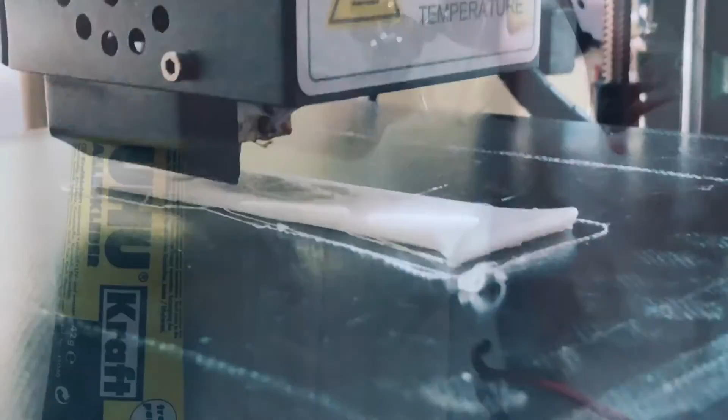Fashion is all about staying unique, isn't it? People create custom-tailored clothing and many other everyday items. But some items like a watch band is, or should I say was, more difficult to create.

At SelfCAD, we would like to show you how you can 3D model your unique watch band and 3D print it with flexible filaments that will feel and look really nice. Want to try? Then let's begin.

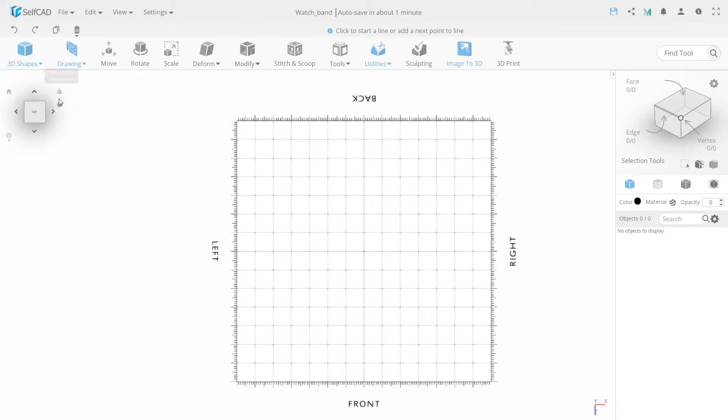We start by modeling the base. Select top view and orthographic projection to turn the workspace into a 2D canvas. Go to drawing section and select 3D sketch.

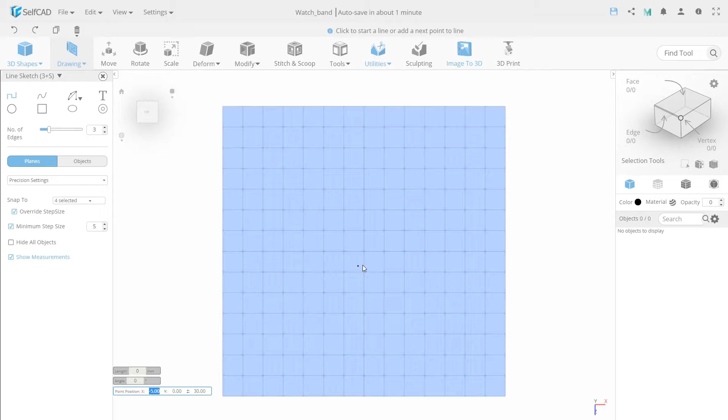In the drop-down, find precision settings and switch on minimum step size and set the size to 5 and check the override option. Choose rectangular sketch and set number of edges to 7.

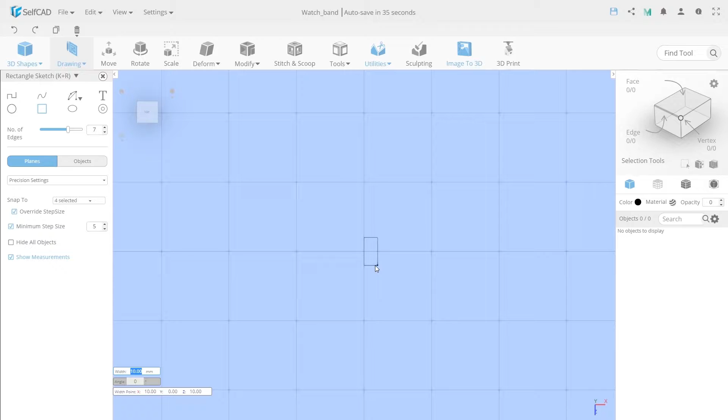To draw the base, we will start the first point from the center of the grid and move on the second point 2 steps, each step of 5, and then move down by the same amount, so the total edge length is 20. Then set the width to 72, and so we have a 20 by 72 rectangle.

Now let's make a divider to separate the band from the part with the magnets. Choose line sketch for this, find the top and bottom second points and draw a line between them.

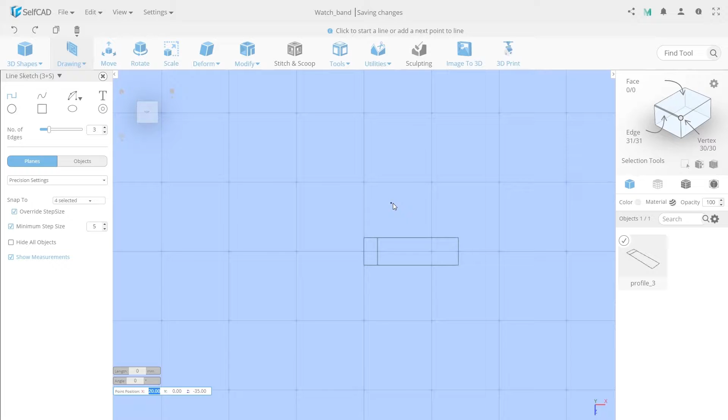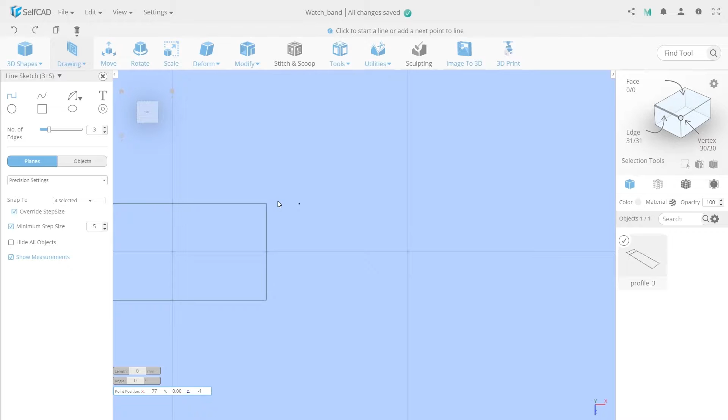For the next step, move the camera more to the right, and now let's create the part that will attach the band to the watch. It should have a width of 5, and since our rectangle ends at 72 from the center, draw a line at position 77 on the x-axis and set -17 as the first point on the z-axis and 17 on the second point to get an edge length of 34. Then click escape not to make unneeded dots.

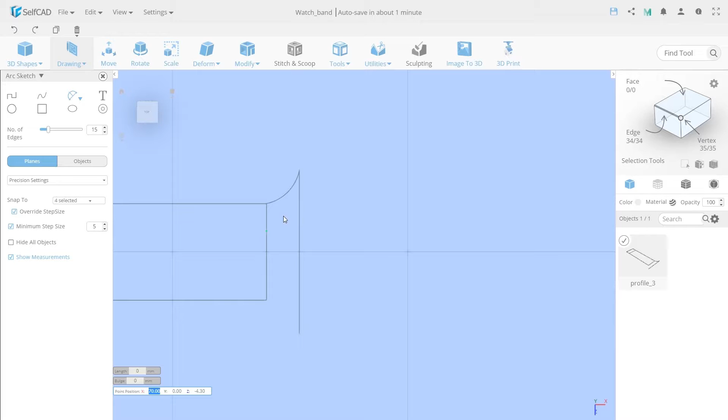Now let's combine them all with an arc sketch. Select a 2-point arc. Make sure you have the override step size on so it ignores the minimum step size when snapping to other points. Then draw the arc between the rectangle and the line and set the bulge to 1.5 and repeat the same on the other side and close.

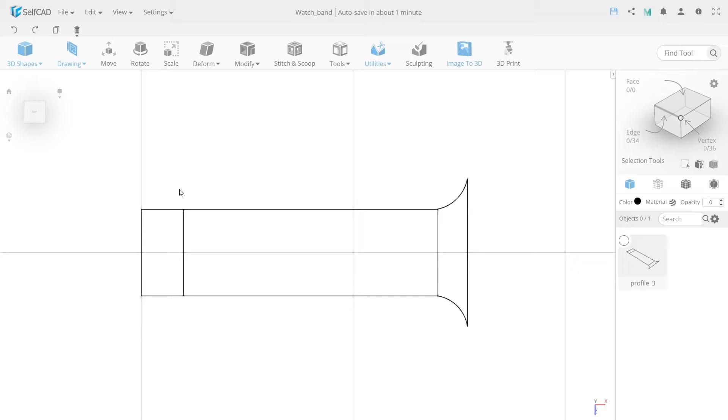Before we switch back to the perspective projection, we need to make a pattern. I'm doing it right now because it's easier to draw an appropriate pattern before I convert this profile into a mesh and lose the clear borders. So select the drawing tool and unhide all objects.

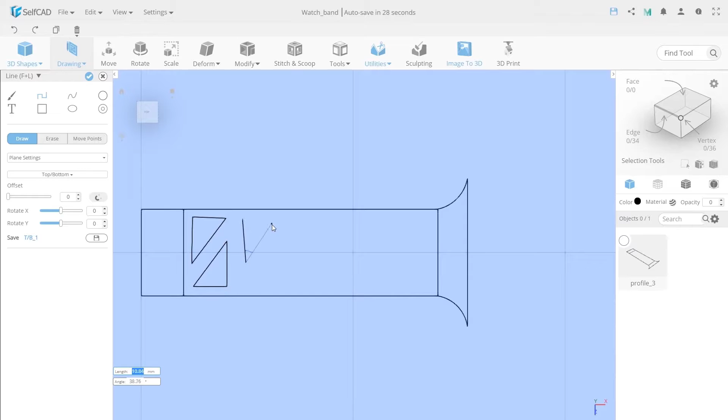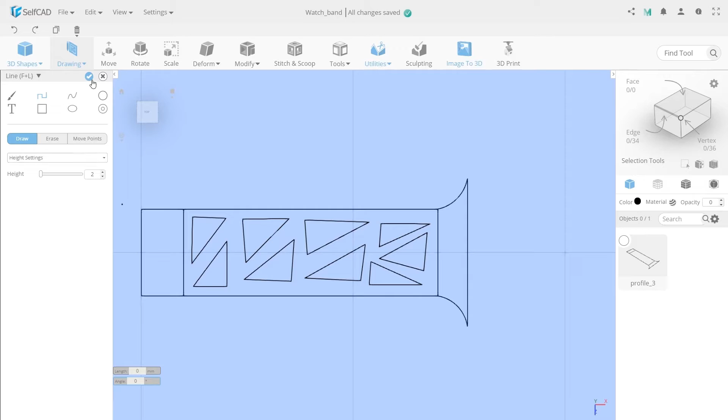Choose the line sketch and draw a pattern you want. I will make it from triangles. Now set the height to 2 and apply. Then turn the perspective projection back on to see our results.

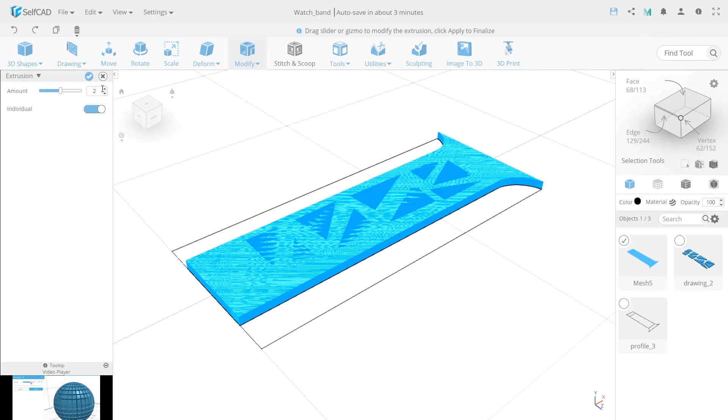To turn this profile into a 3D object, use fill polygons in the tool section. Then to add height, use extrusion with a value of 2. I will rename all objects now and hide the band pattern as we won't work with it now.

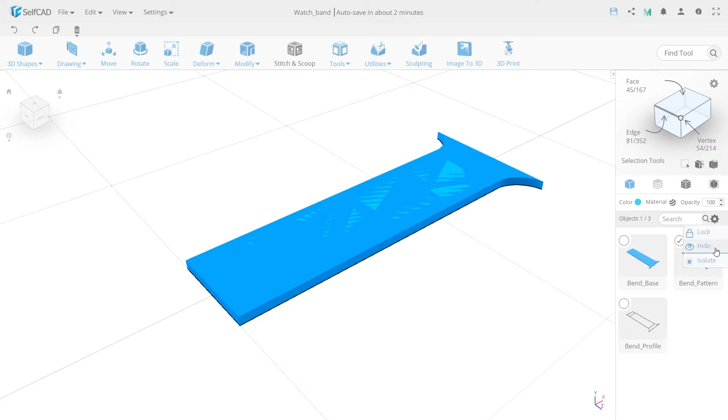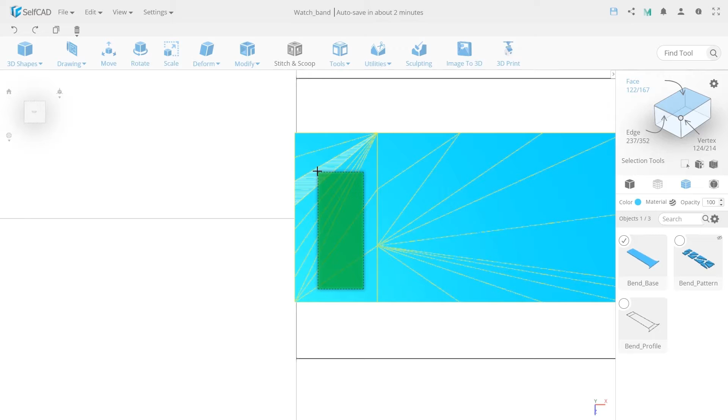We need to extrude the part where the magnet is supposed to be a bit higher. For this, switch to top view, turn on face selection, and switch to Mesh plus wireframe mode to see the lines we drew to divide the objects into 2 parts. Then select the smaller part and extrude it by 1.

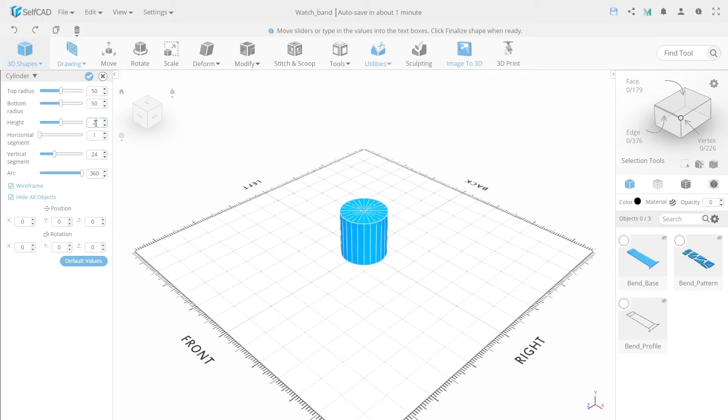Next we will create the cylinder that we will use to make a hole to position the magnets. Choose cylinder and set height to 2.3, both radiuses to 1.5 and vertical segments to 64 and finalize. Now we need to move it to the center of this part.

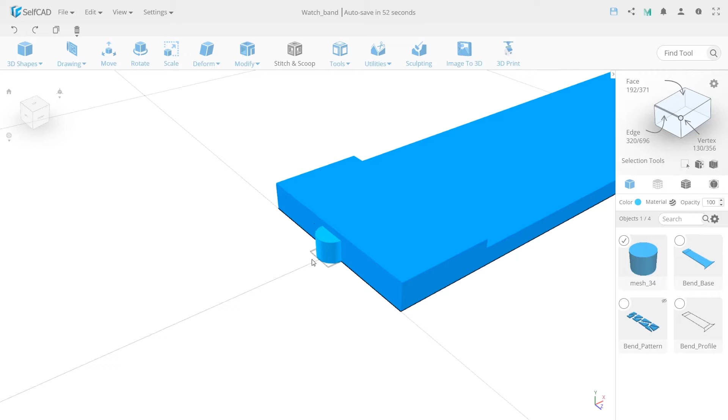However, to position it correctly, we need to do the math, and that can take some time. So I will show you an interesting tip how you can make such moves much faster. Every object has a pivot point that is used for the object's coordinates. By default it is in the center, but you can position it on some fixed positions of the object, or as in our case, we will position it manually.

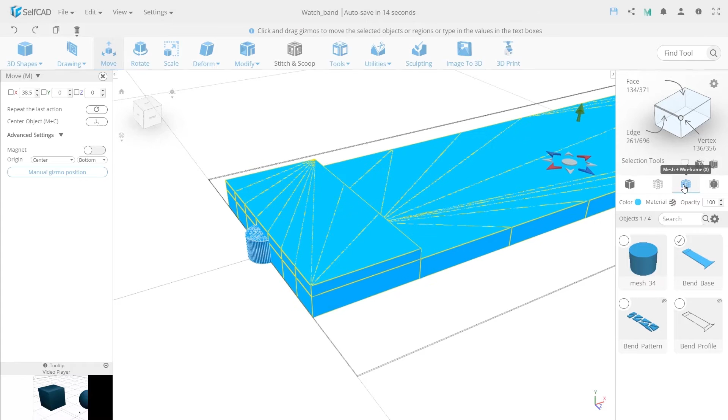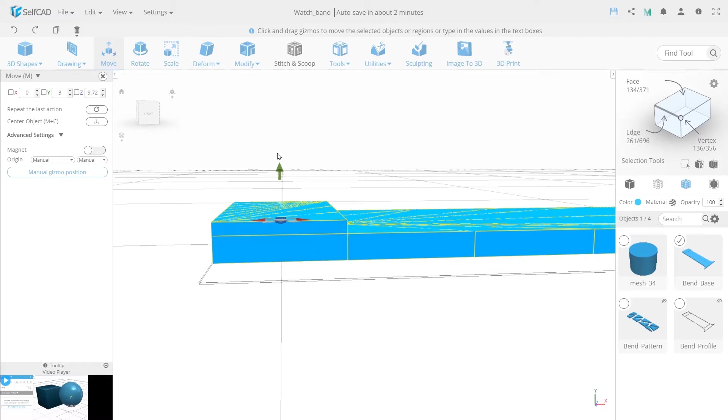Open Advanced Settings and use Manual Gizmo Position and place it in the center of this section. You can see that we have 5.03 on x-axis, and that's the distance between this part and the center of the grid. So we simply need to set the x-axis to 0, and this will place it in the center of the grid and align it with the cylinder. You can see the results by switching to wireframe mode.

If we deselect the object, the pivot point will reset back to the center of the object, and so we now have 33.47 instead of 0 on the x-axis.

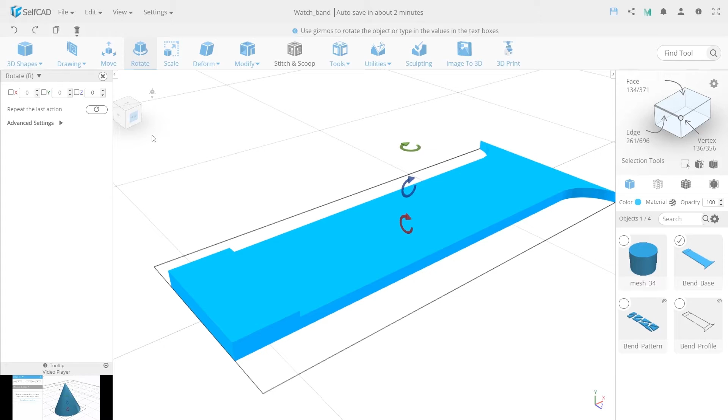Now if you rotate the object by 180 degrees on the x-axis, you will see that we are still missing the back faces. We can fill it with the Fill Polygon tool as we did before, but I want to show you that we can also fill it with Magic Fix tool. Select the base, turn on Magic Fix and set it to 148 and apply.

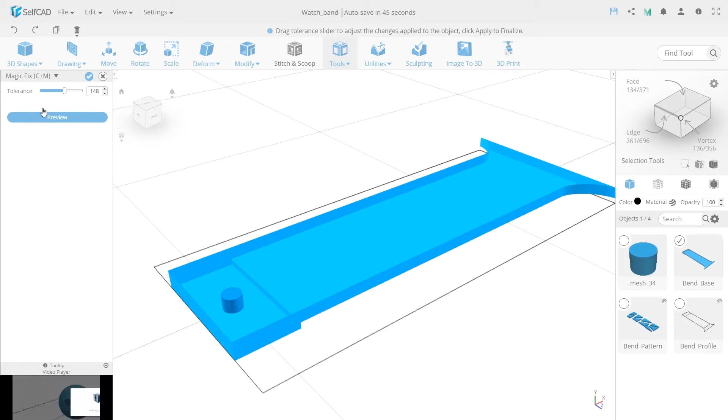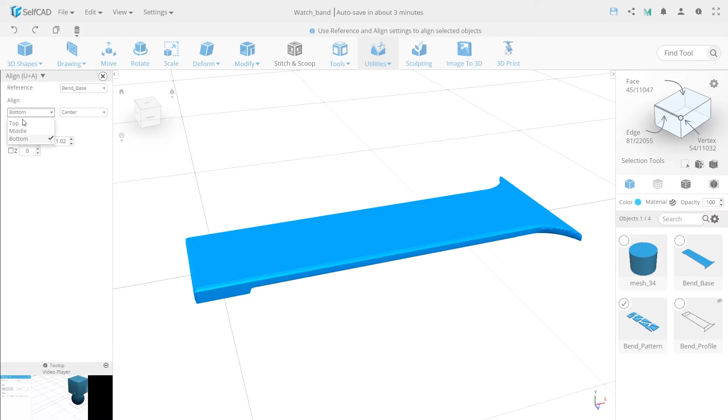Before we create the final part and make the assembly, I will unhide our pattern and align it using the Align utility. Set the base as a reference and align it to the top. I will also set a minus 0.1 offset on the y-axis to make it bulge in so that it will solidify correctly on the final step.

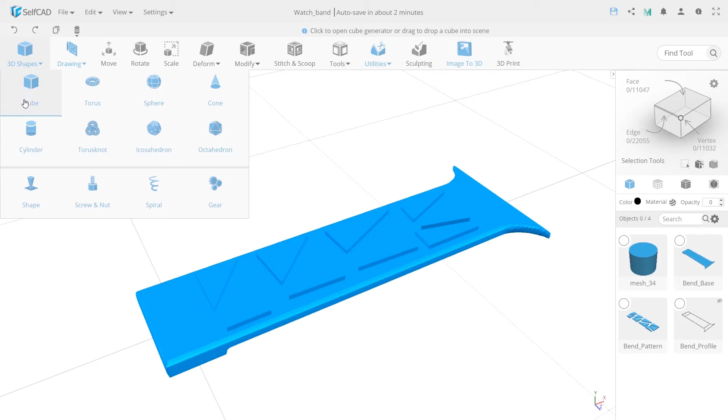The last part we need to create is a connector between the band and the watch. Select the cylinder shape and set the height to 34, top and bottom radiuses to 1.5, and rotate it by 90 degrees on the x-axis.

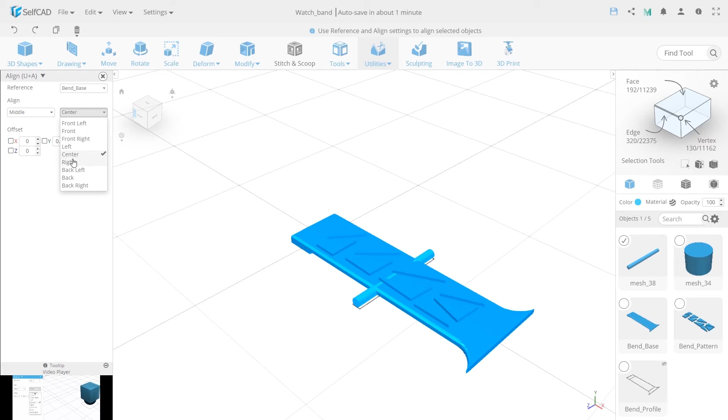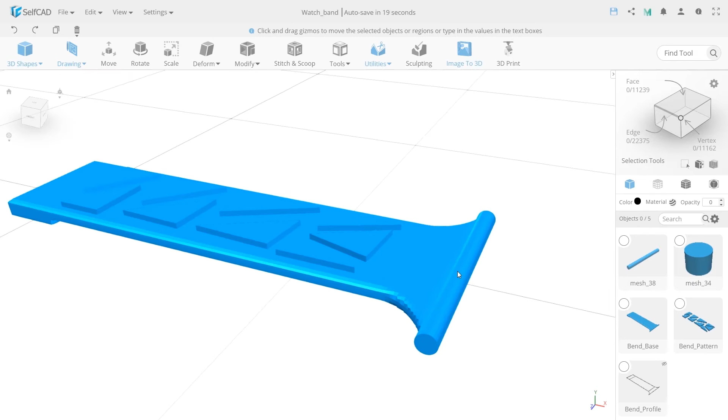Then, to place it correctly on the base, use the Align tool, select the right and middle option, but we need to place it on the right edge horizontally, so set minus 0.6 on the x-axis and move it to 0.5 on the y-axis. Now select all objects except the part that will be used to cut and merge them.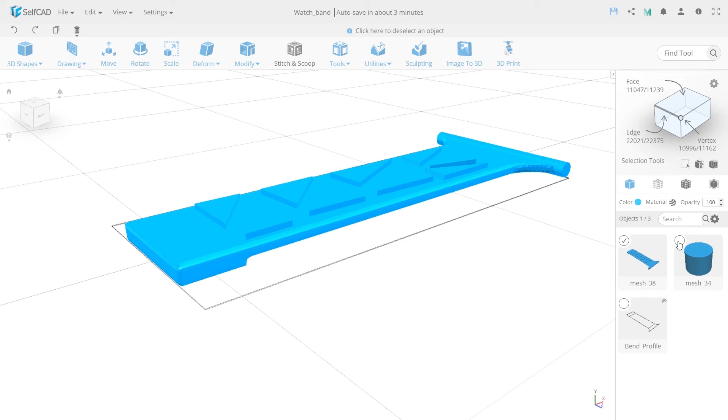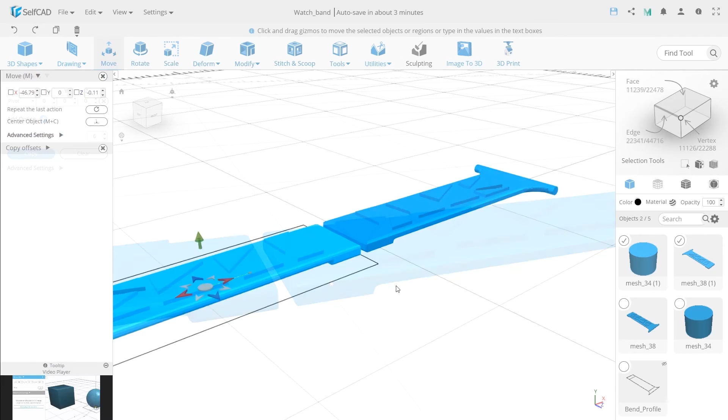We are almost done, but we first need to create the second band. We can simply make a copy of all the objects and rotate them or use the mirror tool, but I would like to show you how you can do it using the pivot tool in a copy offset. This tool will do it all in one step, and it's also a very powerful tool for creating many copies in a circular pattern. Now let's rename the objects.

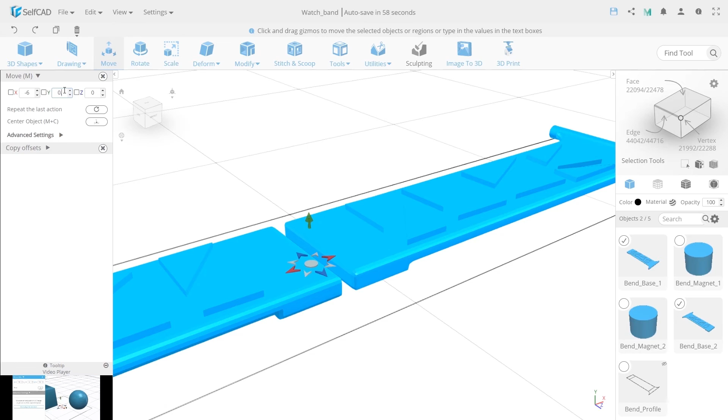Then select the band and position it at 0.1 on the y-axis, so the object for the magnet will be a little lower. Select the first set and apply Stitch and Scoop with Options Difference, and select the cylinder in the drop-down to cut the cylinder out from the base.

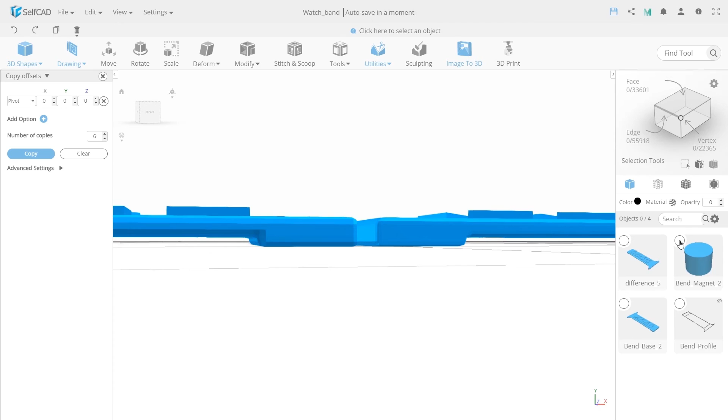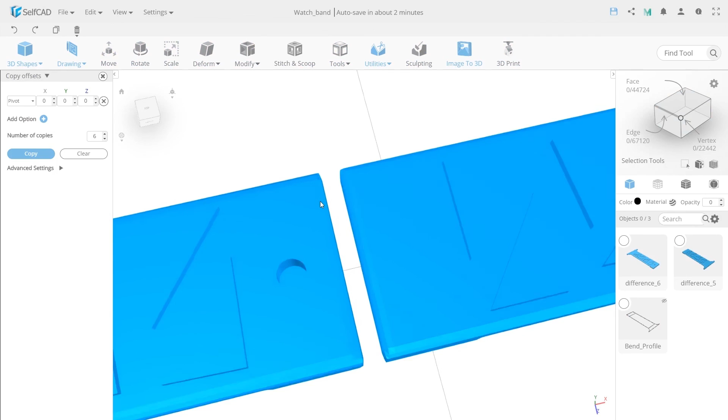For the second band, we need the cut on top, so position the cylinder to 0.75 and repeat the same Stitch and Scoop process. As we are done, I'm deleting the profile and I'm applying the final magic fix to make sure the object is ready to print.